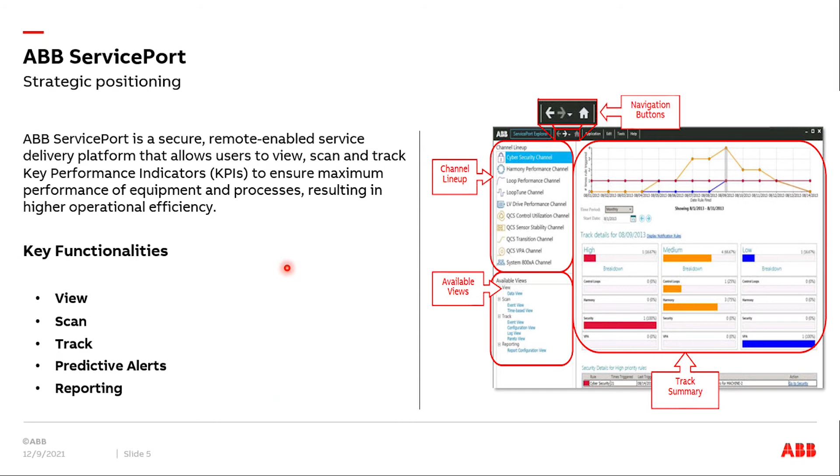So ABB QCS performance service channel is accessed through the ABB Service Port. It's a service delivery platform conveniently deployed at the customer location. We can view and operate the channel through a web-based window that is easily accessible by the team members we choose.

With the ABB QCS performance service channel, we get the advantage of continuously monitoring and data analysis to greatly reduce the time and effort needed to identify the issue with the transition, control utilization, or sensor stability, the configured range, if those are falling above the threshold.

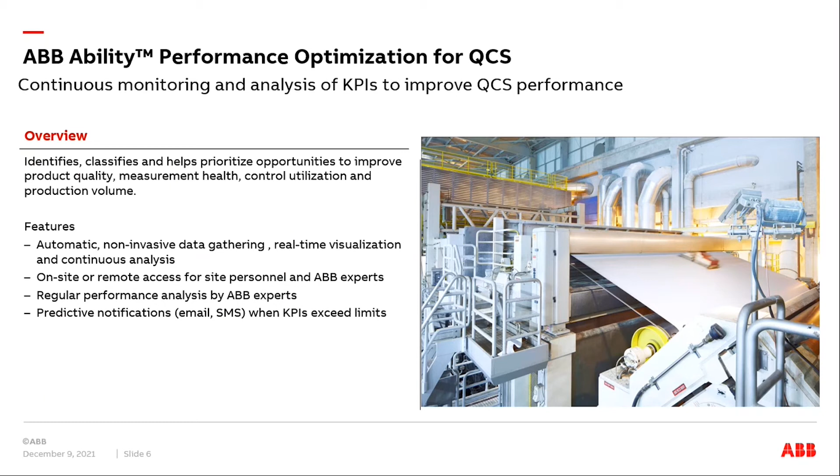This data is classified based on our specific KPIs to provide a list of problematic items that are then prioritized based on the severity, process area, and criticality. This analysis leads to more informed, more responsive decision making by our team, resulting in better performance and utilization.

So this is why we need process performance improvement digital service. So what is the need? The digital technology accelerates service delivery. In the traditional service, what we have is we can ensure the availability of the system, we can avoid plant downtime or plant disturbances, and we can control the cost for the shorter duration.

With process improvement services like fingerprint, we can increase reliability, improve process performance, and reduce quality variances and drive productivity improvement. But with digital, with the present situation where we have a lot of data to be analyzed, we can analyze the data quickly, we can capture the data very fast, and we can improve the performance continuously on a long-term basis.

So why do we have QCS in our machine? QCS in today's production environment - paper makers depend on the quality control system.

This equipment is for the daily operation of their paper machine. It maximizes the production throughput and the quality. The QCS must also be performing at peak efficiency; when control loops are not tuned or left in manual, or when they are taking more time to make on-spec paper, the benefit of modern control technology is not working optimally for the paper maker.

So if a sensor maintenance issue goes undetected, this may cause unscheduled downtime and loss of production. This QCS performance service addresses the issue by continuously analyzing the control utilization, sensor stability, reel variability, and product transition to improve the QCS performance, resulting in better production at lower cost to a paper maker.

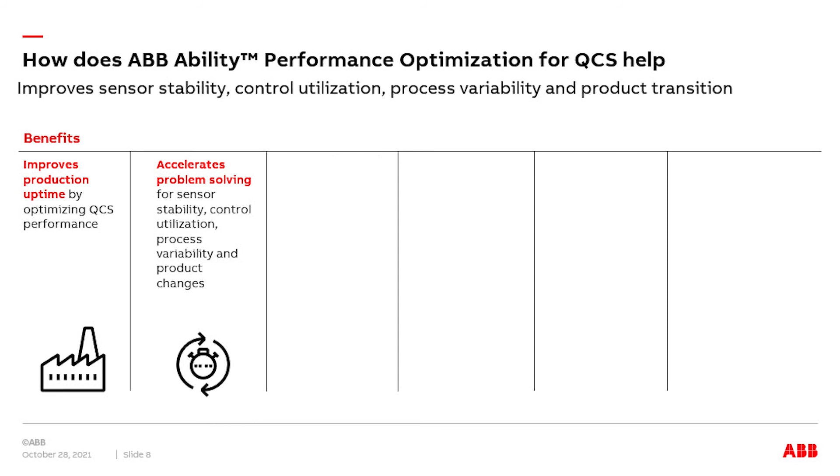It accelerates the problem solving for sensor stability, control, and all the channels related to the QCS performance service. It saves time and money with automatic grouping and quick analysis of production quality data by grade. It identifies the opportunities to improve the measurement and control performance. It fills the gap we have observed.

It reduces the response time and travel expenses because it can be accessed remotely. It can be accessed globally based on the assigned engineer; experts across the globe can access it. It helps a lot when we have to troubleshoot any problem which occurs in the paper machine. It increases the product availability, and process speeds and product quality will increase with this.

Now I'll start the QCS transition channel benefits and its key features. The QCS transition performance service collects data from the paper machine, like transition time, sheet break, weight, moisture, and speed, as well as additional DCS and QCS control loop parameters. It calculates key performance indicators that measure times and conditions, and analyzes them against the thresholds we set when we create a config file. It optimizes the transition time.

It reduces the product waste during the transition. When the product is off spec, it reduces the off-spec time of the paper, so we will get on-grade quality very soon. These are some of the customer challenges when they do a grade change. They report that sometimes they have slow grade changes, and it takes time to get on-spec paper.

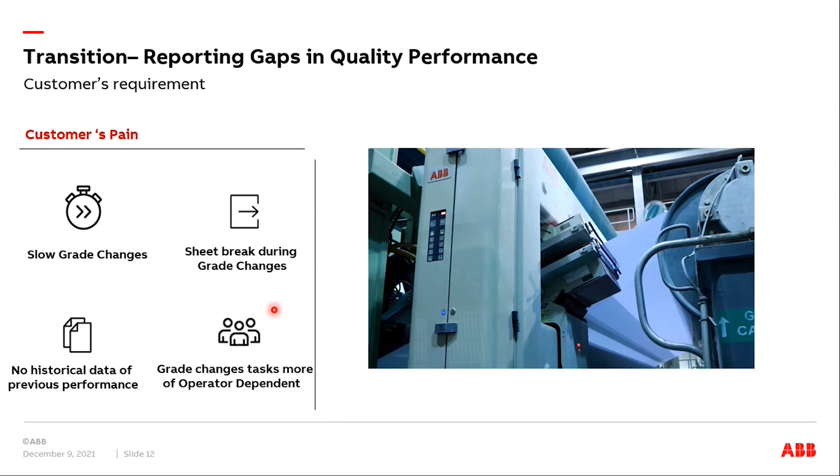They also have a concern that grade change is more operator dependent. Product transition KPIs can be addressed by mill or ABB service people to optimize the transition time, resulting in higher production. Some of the best benefits of product transition are that it continuously analyzes the data for faster optimization, and it saves cost through remote diagnostics.

It helps identify the problem in a faster way. It reduces product rejects, because when we get on-spec paper very fast, our rejects definitely are going to be reduced. More efficient transitions.

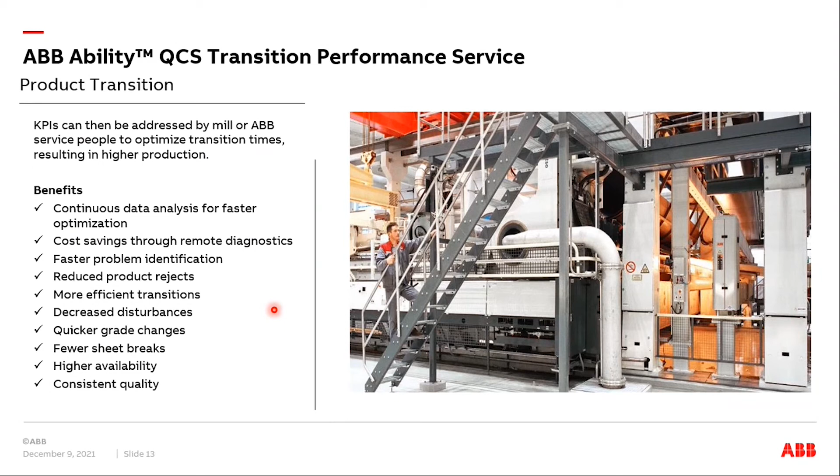We can compare the multiple transitions time to time, and we can get the best transition. How can we achieve it? It decreases the disturbances in the paper process. It helps to have quicker grade changes. As we can analyze the grade changes, we can also reduce the sheet breaks. We can pinpoint where the problem is. With this, we can make sure that the system is highly available, and we can have a consistent quality of the paper.

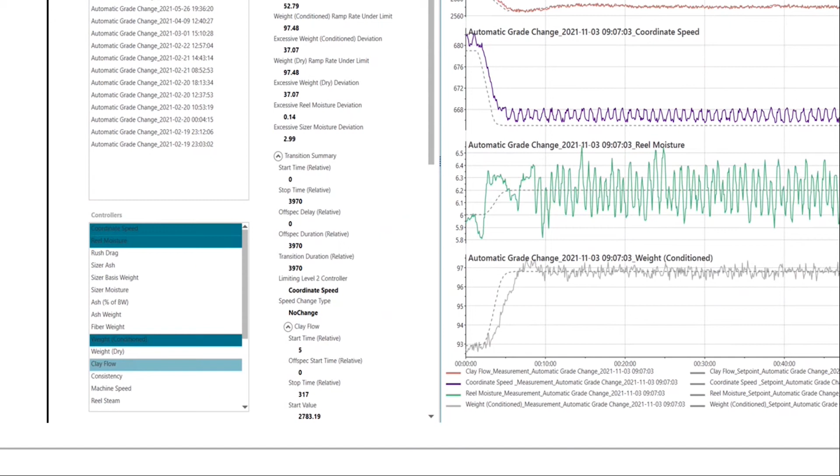So this is the data view of the transition channel, where you can see this is the history of the transitions which have occurred, and it logs all types of transitions like automatic grade changes and manual grade changes. Here it shows the controllers, what type of controllers have been configured here. So you can decouple it if you want to monitor only some basic controllers. If you want to have all controllers, you can configure all controllers.

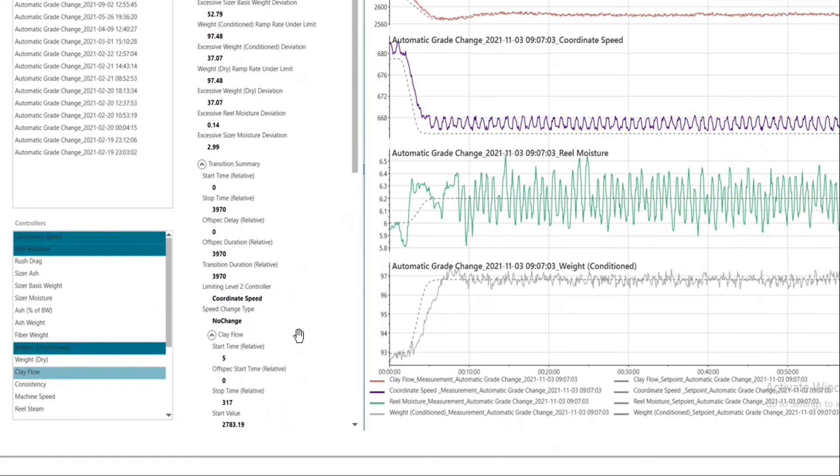Here we have a KPI history, KPI of the selected grade. This grade shows the excessive transition time and all the related KPIs here. It also displays the transition summary of the complete grade change. It also shows the detail of the selected controller, like when it's been started and when it's been stopped, what are the start and stop values.

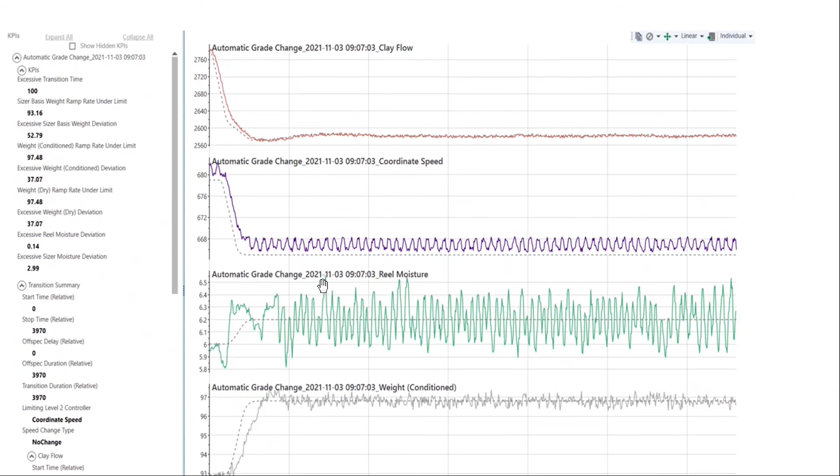And here we can have a raw data trend where we can see how the automatic grade change performs, how the measured value and the set points correspond, when it's been in on spec, when it's been off spec, how it's been ramping up. And we can even compare the different controllers as well over here.

This is the view of multi grade changes, where we can compare 2 or 3 grade changes if you want. If you want to have a comparison between the last grade change and the current grade change, and we want to see what is the improvement and due to which the things are not working properly, then we can do it using this multi-grade change view.

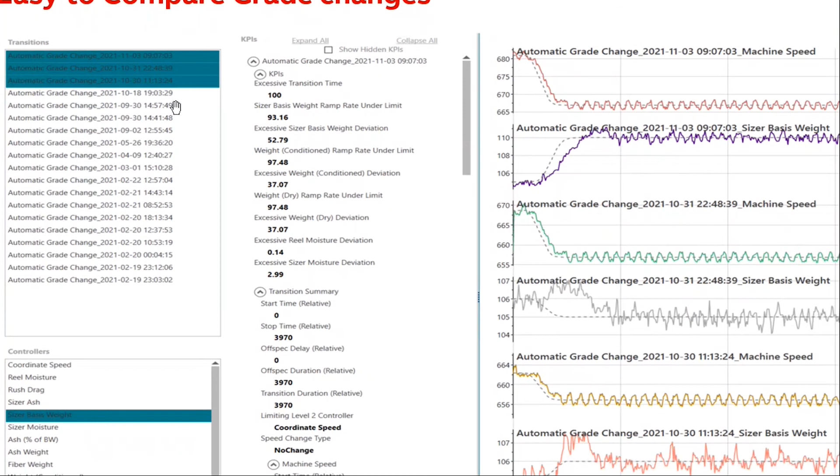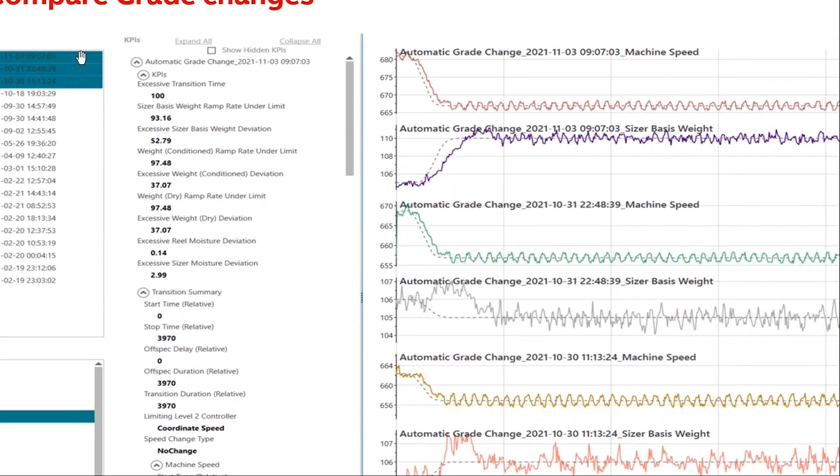We can even select multiple controllers over there, and if you want to compare sizer, basis weight and machine speed for these 2 or 3 types of grade, then we can do it over here. Here it will give the KPI details and the transition summary of each grade which is selected. Even with the trends, we can also view what type of data we need, like machine speed.

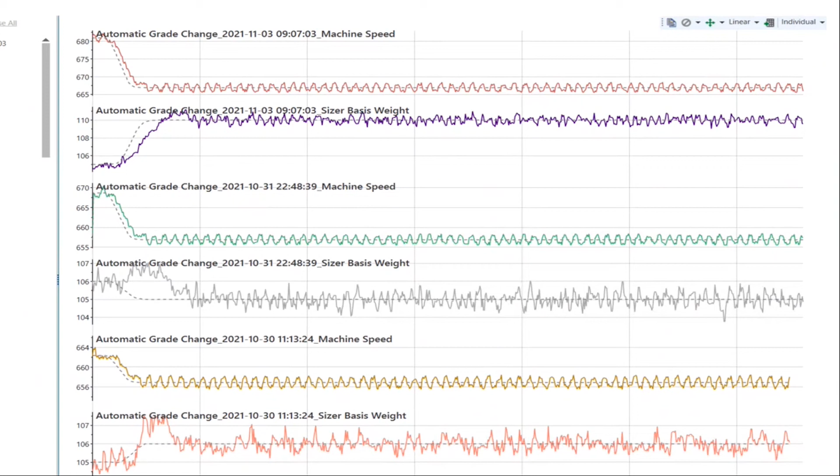If it is not stable for a particular grade and it's stable for another grade, we can identify, okay, due to machine speed, it has taken a lot of time. Whether there is a sizer deviation or moisture deviation in the reel, or the weight deviation, that also can be identified with the multiple grade selections. So this is our KPI view.

The event view of the transition channel provides KPI trend summary over a selectable time period. ABB QCS transition performance service conducts automatic periodic calculation of KPIs and transition data for analysis to greatly reduce the time and effort needed to identify performance issues. This data is classified based on the specific KPIs to provide a list of potential problems that are then prioritized based on the severity, process area, and criticality.

This analysis helps find the root cause of problems and trend performance history more accurately, leading to information that can be acted upon by the customer or the ABB service people to speed transition times. So the KPIs we analyze here are the excessive transition time, sheet break, weight ramp rate, weight deviation, moisture deviation, and steep speed ramp rate. This we can see in more detail when we go to the live demo.

But after the implementation phase, it's been reduced, from 30.8 minutes down to 25.3 minutes. So it has saved almost 6 minutes of the grade change, and it increases the efficiency and on spec paper, due to which the product wastage is reduced.

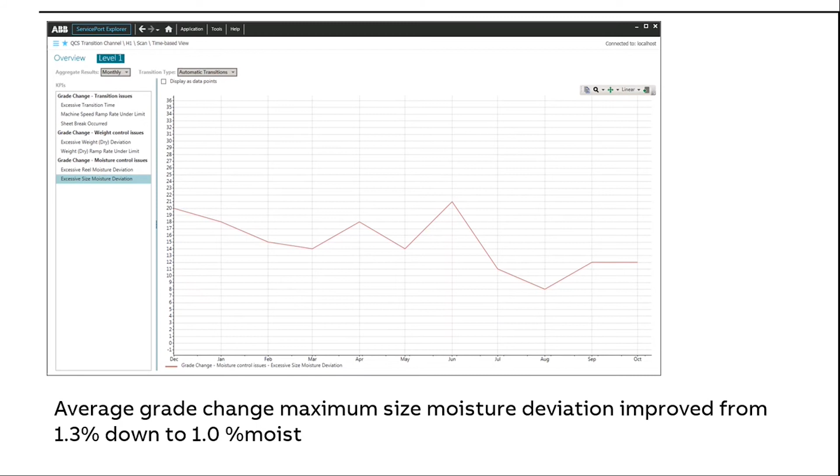So here the trend on the left is the scan time based view, which is mostly the KPI average of the maximum moisture deviation during the grade change transition. Here, if you see, the average grade change maximum size moisture deviation improved from 1.3% down to 1.0%.

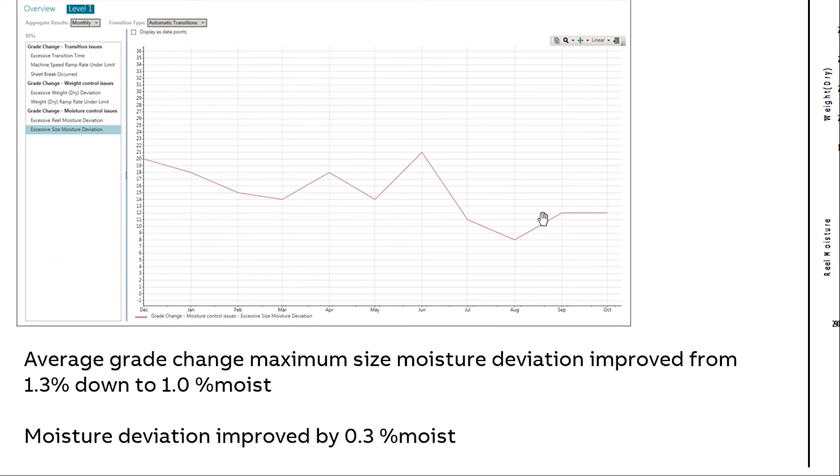When the implementation phase has been completed, after the tuning of the system, we have seen a steep deviation in the moisture control, which indicates that moisture deviation improved by 0.3%, and due to which the transition time has been reduced and we get the on-spec paper very soon.

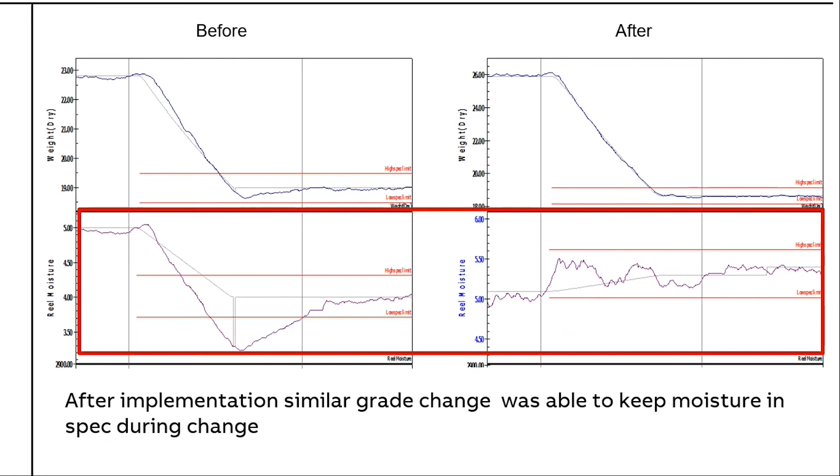The plot on the right compares two separate grade changes, in which the improvement in the moisture response during the grade change can be easily seen before and after. If you see, there is a significant improvement in the moisture change. Grade changes on the left and right are comparable in the sheet weight change top plot, but the moisture deviation from target (the gray plot line is the target) is much less after the grade change improvement, as shown in the trend on the right.

So basically what it is trying to say here is that when we improve the moisture deviation, the weight gets on target very soon. With the implementation, when we corrected the moisture issue, we get the product on-spec paper very soon, and it improves the transition time and reduces the reject of the paper.

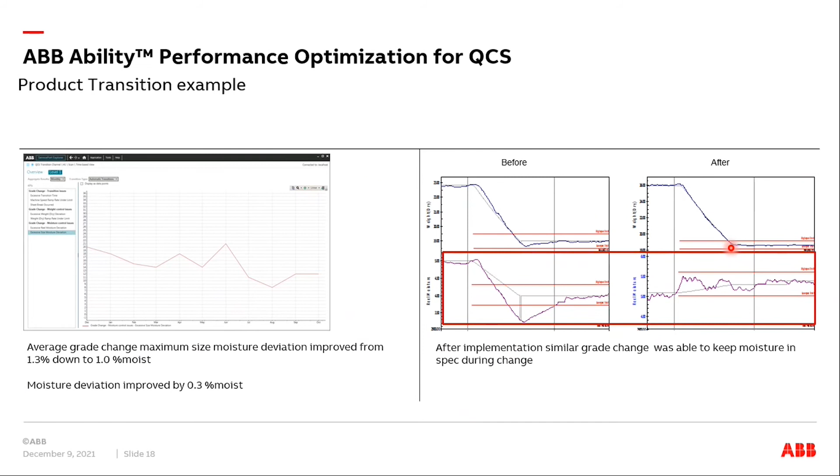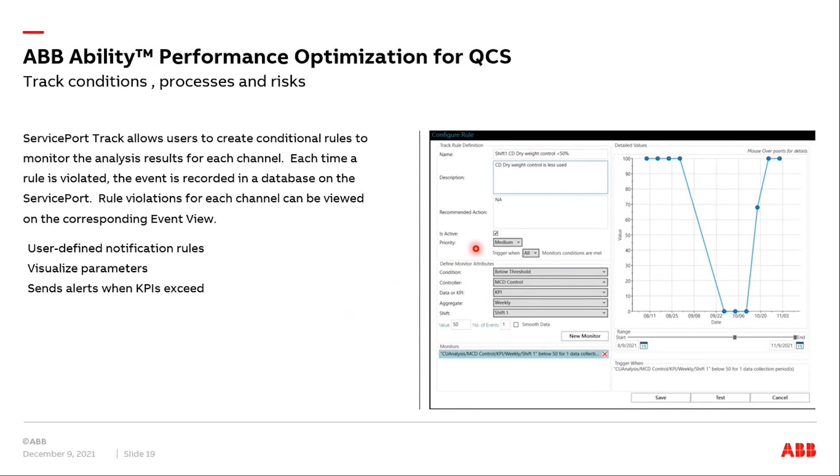This slide indicates a Pareto view of the track rules, where if you see a big bar here, it indicates that this rule has been violated 44 times. This is one of the beautiful features of the Service Port, where we configure a track rule for the monitor. We can continuously monitor over a significant date range that this rule is being violated 44 times, and it's been assigned as a high priority and it needs immediate action. So the action can be taken and an action plan can be made before a severe condition is reached.

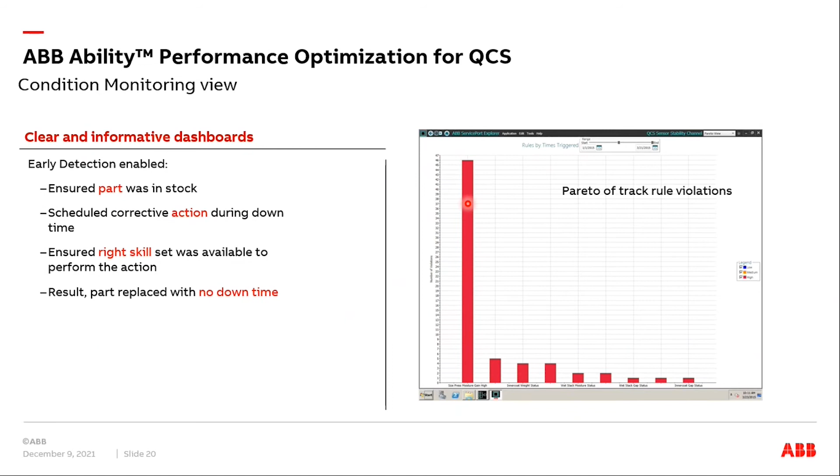If you see, there are some other track rules also triggered like 4 or 5 times. These can be put on low priority as an action plan, and this one can be considered as high priority because during every grade change or every standardize, or whatever channel is being monitored, it's been triggered. So this needs high attention over this period.

This is the track summary. This track summary is completely based on the track rules we configure. So if we have configured more track rules, and those track rules have been violated or crossed the threshold, these dashboards will give us the indications. If we have track rules with high priority, medium priority, and low priority, these dashboards keep on populating accordingly. Here the one indicates that one rule has been triggered 1 time, and the medium priority rule has been triggered 4 times, and control loop harmony we can configure similarly for the transition. The benefit is that we can prioritize our requirements and have an action plan to do it.

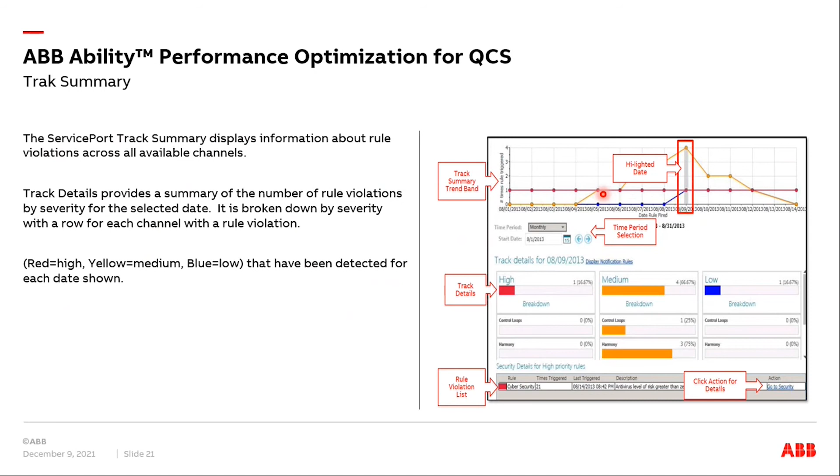This track screen shows all trends being monitored and allows the user to choose specific trends to analyze further if, for instance, a trend appears to be outside desired operating parameters. This is a log view. It's available for a more filtered and detailed look at rule violations that have been previously detected. It can be sorted based on the requirement. We can even select based on priority. We can uncheck it; if we want to monitor only the high one, we can just monitor the high one. We can even filter it using the rule.

It has all the events which have been triggered. We can just select the date range. We can look at it for the year, for the month, how many times a log has been triggered, and at what time, during what grade change it happened. So all details can be seen on this view.

This is one of the email templates: when the rule is violated and the email notification is configured, the email is triggered to the ABB representative or the customer. So when you configure a limit and it crosses a threshold, you have data that the last grade change has happened and the moisture deviation is high and the weight deviation is high, so the product is going to get rejected.

So it needs some type of tuning to get it fixed, or some process disturbance has to fix it. So this type of action can be well planned and you will get alerted. So you will be ready when you visit the paper machine with what action needs to be taken.

This figure represents the overall transition performance. The value of each horizontal bar here identifies the average KPI for each diagnostic area. KPI values of 0 here indicate good performance, and values greater than 0 indicate an issue that needs to be investigated. The KPI is limited to 100 and values near 100 indicate an issue that is higher in severity.

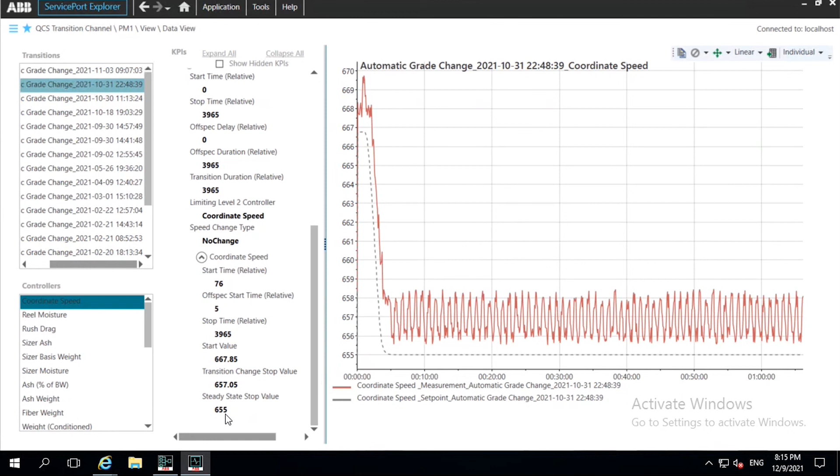It also gives the KPI summary of the selected controller. Like if we have selected here the coordinate speed, it indicates when the speed change started, what is the start value of the speed, and what is the steady state value of the speed. We can even compare two or three of the controllers based on the requirement if we want to monitor the data.

It also has the advantage of selecting multiple grade changes, and if you want to compare the performance with the successive grade change, you can compare, and you can also come to know due to which controller or which parameter this grade change has taken more time than the previous one, or maybe less time. So you can pinpoint that and take a corrective action. You can even copy this data into Excel and generate your own data analysis if you want to.

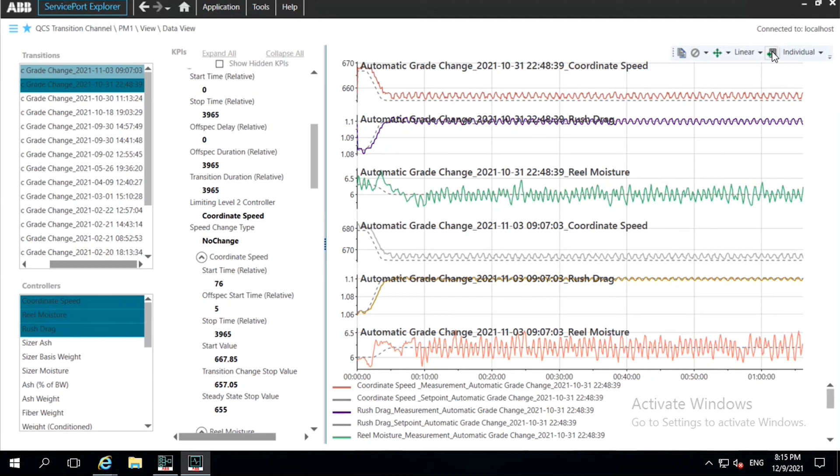Then we'll go to the scan event view. Here in the scan event view, the aggregated results have an option of weekly, monthly, and quarterly. We can select any of these options to monitor. Then the transition type is automatic transition and manual transition. Here no manual transition has been performed, so it's not showing, but you can select between all transitions, automatic, and manual.

This trend summary indicates the period selected over here, as weekly points. If you select here, no transition has been performed during this time, so it shows 0. But if you select October 25th, one transition has been performed here. Accordingly, you can just mouse over and see all this. So here one transition has been performed. You can even go to the monthly view and see. So 3 transitions have been performed during this month, and these are the data captured over here.

So average severity indicates 49% for these transitions. Once we come down here, we can see 3 types of category over here.

It's like for the grade change, a transition issue has been captured, a weight control issue, and a moisture control issue. So transition issues contain the excessive transition time, machine speed, and sheet break. If any sheet break happens during the transition, then this KPI will go to 100. If there is no sheet break, then it's 0. So it triggers between 0 to 100. There cannot be any other value.

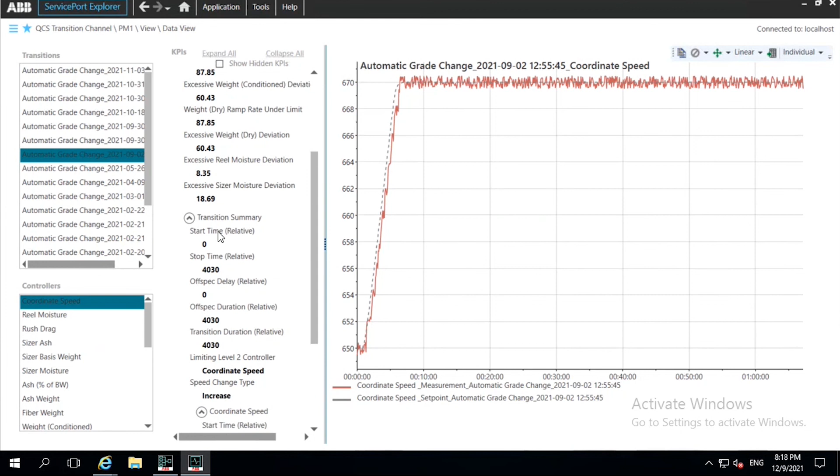And you can also see the excessive transition time. These two transition times have been like 100 and this has been 20. So based on that, you can take more attention on this, and then you can jump to this one and it will take you back to the data view. Then you can come to know, okay, the limiting controller is the coordinate speed, so it has taken more time due to which the transition time is more than the configured range. You can just retune the coordinate speed and see how the performance looks.

Similarly, in the case of moisture control issues, when you select it, you can have a list of complete grade changes which have a non-zero value. It will show over here. 2 or 3 is quite low as compared to 0 - it's close to 0, so it doesn't need any attention over here.

Again, we have a time-based view where we will have a trend throughout the year, or throughout the range we select. Once we go to level 1, we can select what type of transition we want. This basically helps when we want to monitor long-term data - like if you monitor the data of March, April, and May, and we see that the transition time is rising. When we do some optimization in between, we observe whether that transition time is getting reduced, or the deviation is getting reduced, or the sizer moisture deviation is getting reduced. So it helps identify whether we are going in the correct way or the wrong way. Based on that, we can take further actions.

Another one is the track view. Before going to event view, let's have a look at the configuration view.

So in the track configuration view, we can configure some type of track rules. As you can see, we have here 4 track rules configured. These track rules help us send proactive alerts, and based on that we can take some proactive actions. Just for an example, we will configure a track rule like sizer moisture

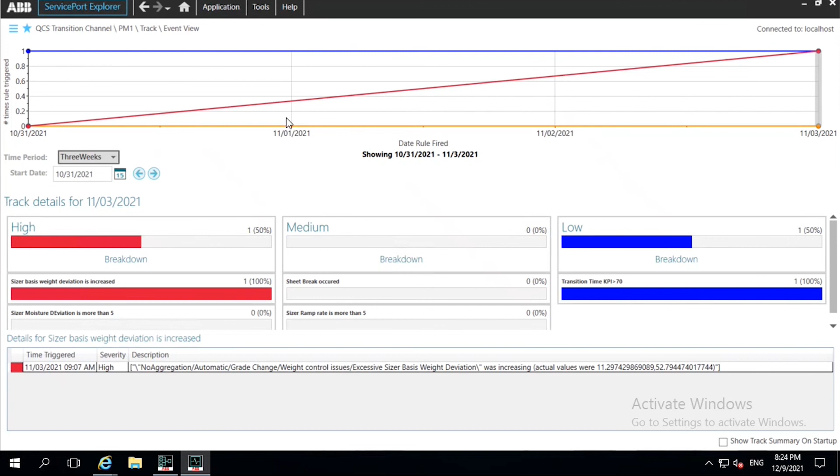And even if you go to the 3 weeks view, then you have a trend summary. Here the blue line is for the low one, red line is for the higher one, and the yellow line is for the medium one.

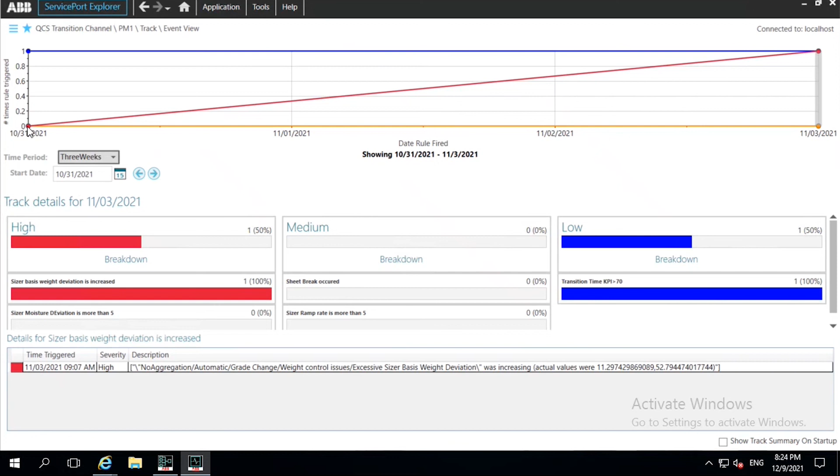So you can select the points here just to see, and it will jump to the data we want. If you go to the quarterly view, the data changes accordingly. And when we go here, the data changes accordingly. This is the event view.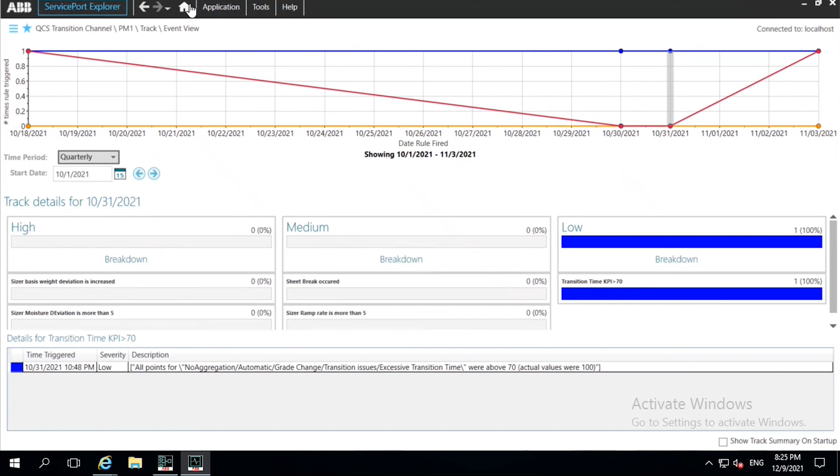Then we have a log view. The log view has the log of the rules that have been triggered every time. We can see the list here. We can even filter it based on priority. If you want to monitor only the high priority rules, then it shows a list of high priority. We can also increase the time range.

If you want to see how many times the rule has been triggered, it has added one more. Based on this, we can also filter it, and we have a clear idea of when this rule has been triggered, what is the priority, and what time and date it has been triggered. This keeps records for the configured period. We can keep the log for more than a year.